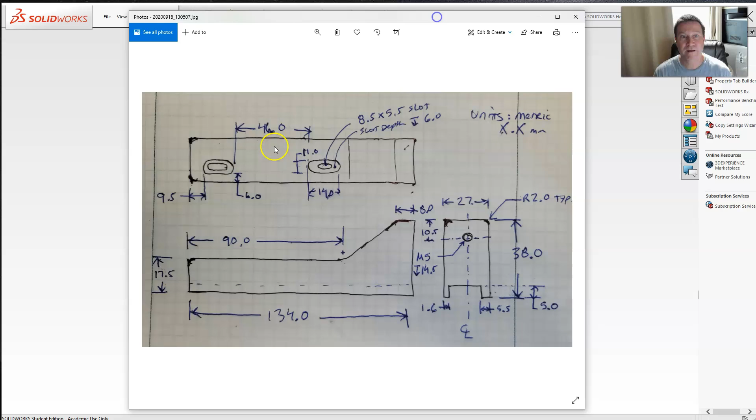So this is what we're going to try to construct here in SolidWorks. Let's start a new part. Say okay. A little slow today.

All right, let's do our first sketch. I'm going to construct it. Always look at a plan of attack here. My plan is I'm going to draw basically this view. I'm not going to put any of the fillets in yet.

Because I do have lower, upper, this dimension, I can just connect two lines, extrude the depth, which is the 27, and then cut out this feature, drill the hole, rotate the top, get our two slots in, and then we're pretty much done.

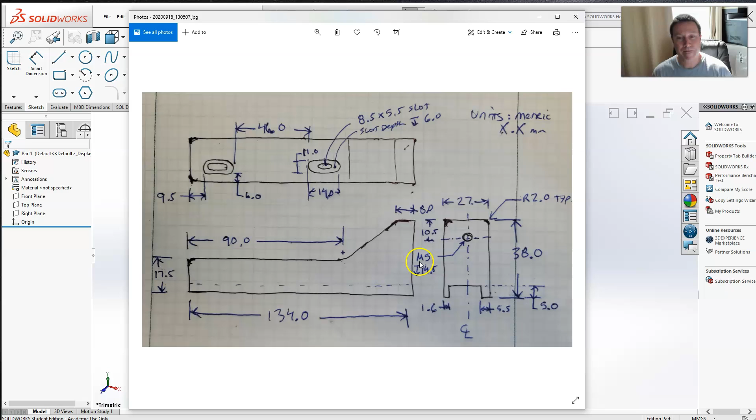So let's start on the front. Make a sketch on the front plane. I'm going to create the bottom left corner as the origin.

Well, I'm looking down here. I'm already in my units as millimeters because I've always kept that as my default. So first thing you want to do is always check your units.

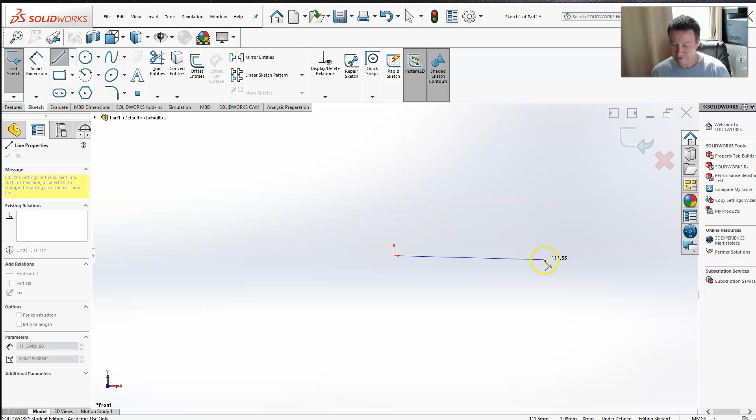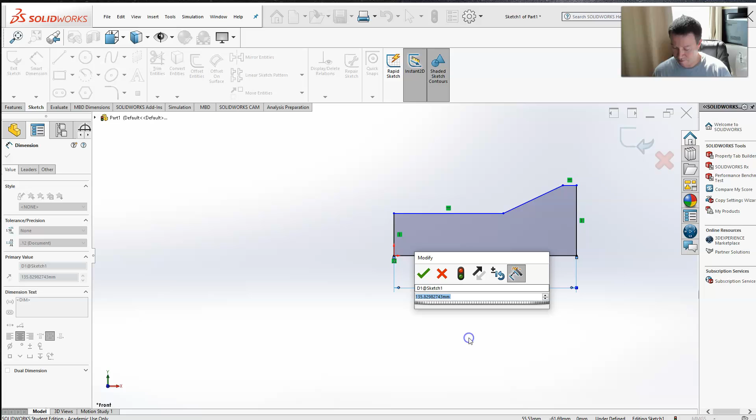Get close. Now let's just dimension it out. We know where our dimension is, so we took from the bottom, 134. We know the height in the back, 17.5.

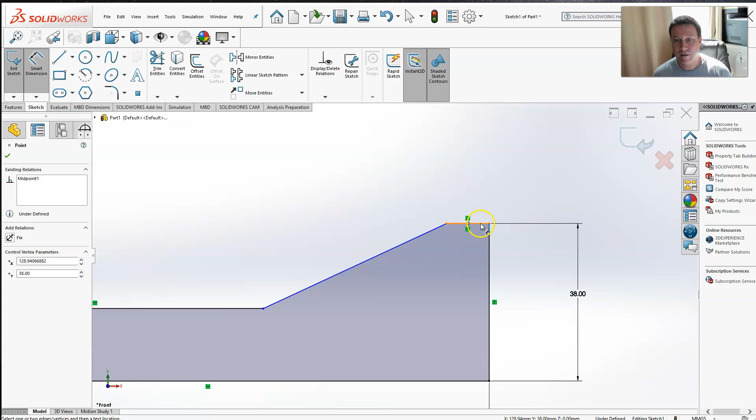And this little itty bitty piece right here, let's zoom in. Why don't you work? There we go, 8. And this component right here, 90.

I can see we're fully constrained. Everything's black.

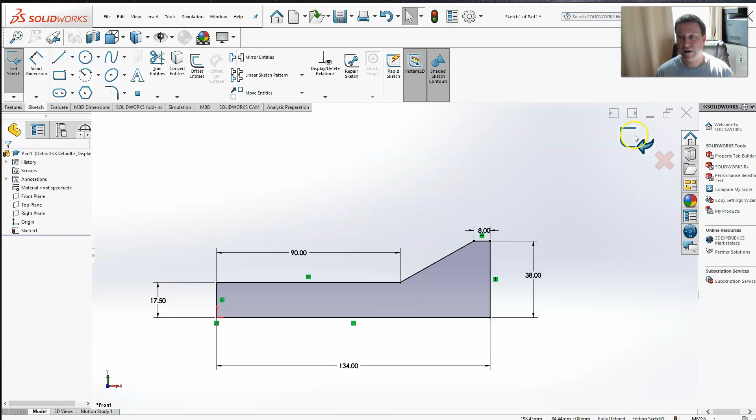Let's go to our features, extrude. You can extrude either direction, doesn't matter. But our width, we measured 27.

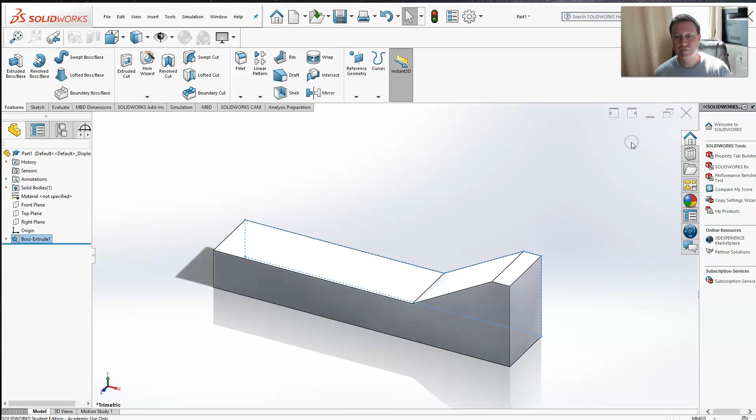Well, got the basic features here. I'm going to work now. Let's rotate. I'm going to do that slot in the bottom and the hole in the front.

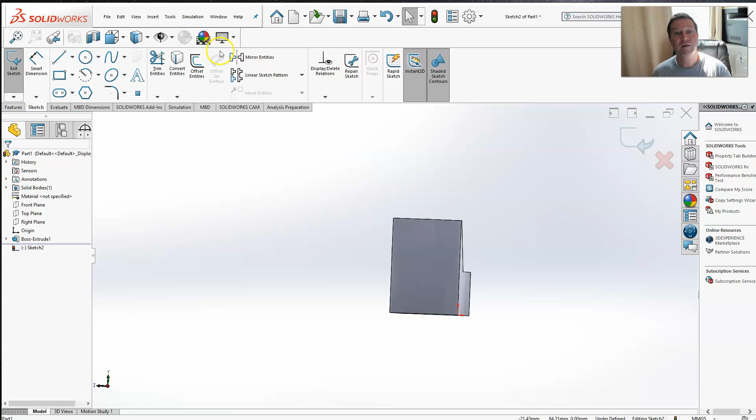So go back to sketch. Select this. And let's rotate straight on.

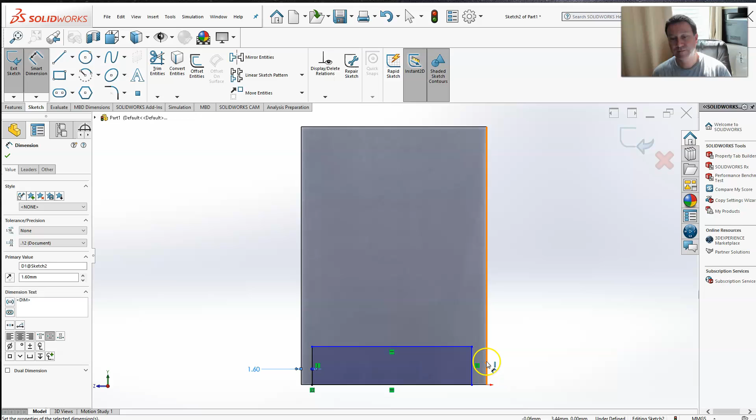And technically, what I'm going to do, I'm just going to do a rectangle since we're going to cut through it. And I'll dimension the rectangle since I'm looking straight on. This will be the left side, the skinny side, which I measured 1.6. The other side, we measured 5.5.

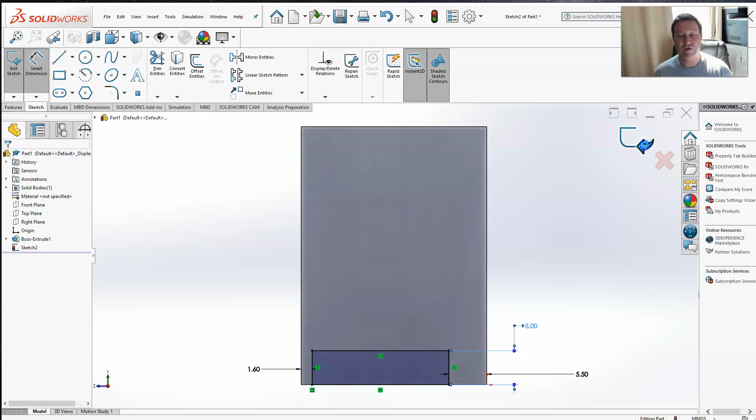And the actual depth was 5. Now I'm just going to do this slot feature first before I do the actual hole.

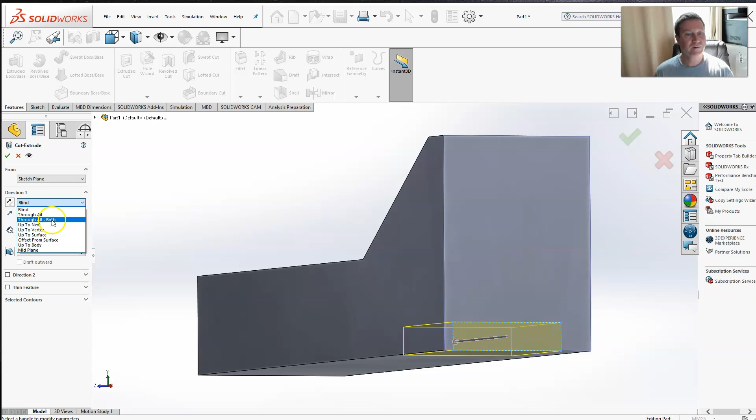Now, oops, I don't want to do extrude boss. I want to do extrude cut. And technically I'm going to go all the way through, so let's go just through all. There we go, through all.

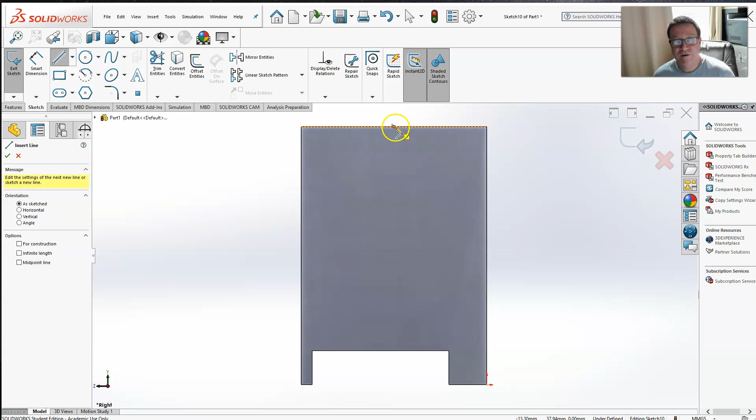Now I'm going to do a sketch for the actual threaded hole. Let me just pick the sketch from this one. I'm going to do it in 2 steps. One, since we measured and we knew it was right down the center, I'm just going to do a construction line.

I like doing construction lines. Constrain to the center of the top, and I'm going to make it 10.5, which is where the hole should be.

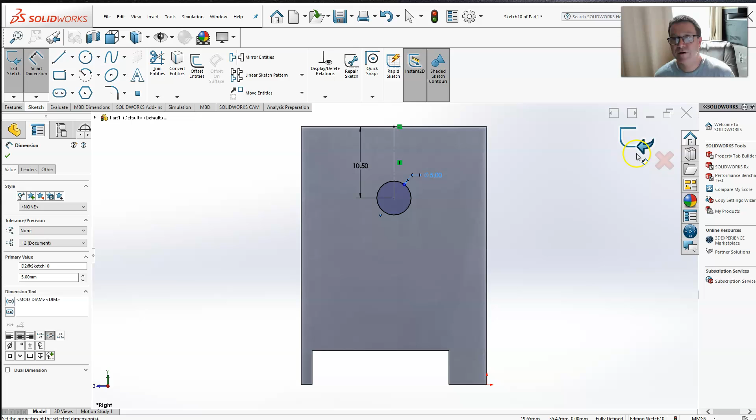Now if I got an M5, it's 5 millimeter diameter. Now I just want to do an extrusion, cut, blind, oops, 14.5. That's why I measured 14.5 down. Perfect.

Now if I want to make it look like a threaded hole, go to the hole wizard. You got threads here.

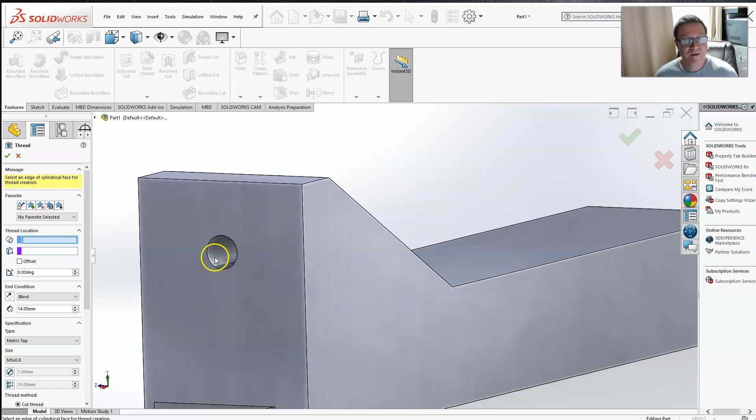Thread location, I'm going to pick the cylindrical hole. Blind, 14 millimeters down, share 14.5, 14.

I actually did some calculations real quick, which I don't have in front of me, but I took that screw I had and screwed it as far as I can into the part. It went 11.1 millimeters down, measured the length of the screw, and then took the difference. I can get 13.8 millimeters into the part. So I'm just going to round it up to 14 for the threads.

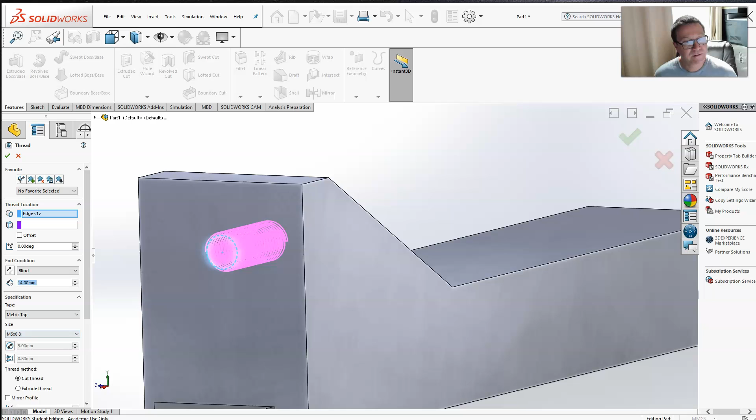Metric tap, M5, cut thread, bingo. Now we have a thread that looks like a thread. Alright, let's take care of our slots now.

Let's put the slots in. Start a new sketch on the top here. There's multiple ways of doing this.

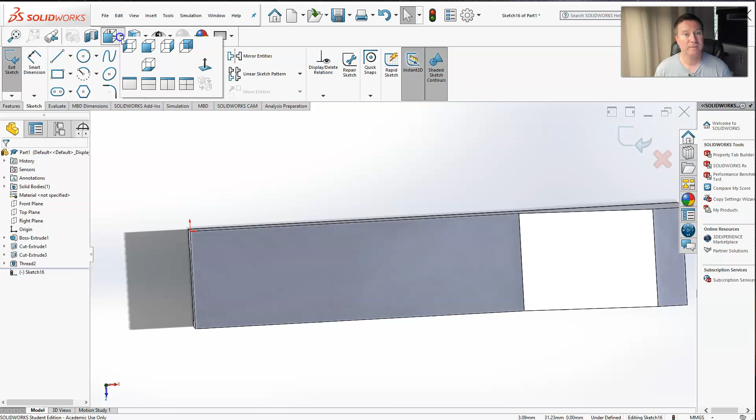Let's use the actual straight slot. There are 2 versions. Take the first version. There are parameters. We know according to our drawing, our sketch, 11 wide, 14 long.

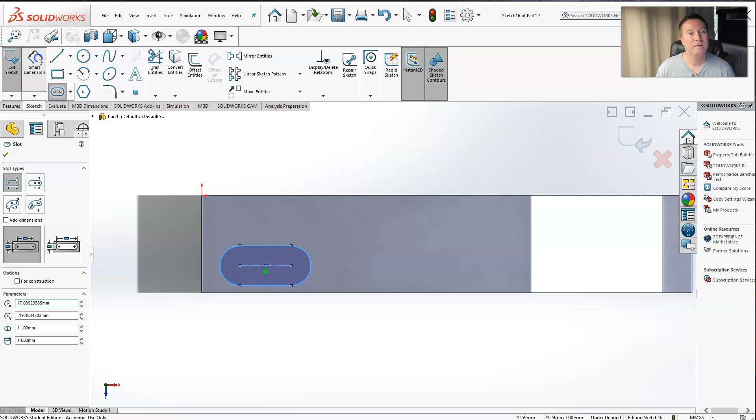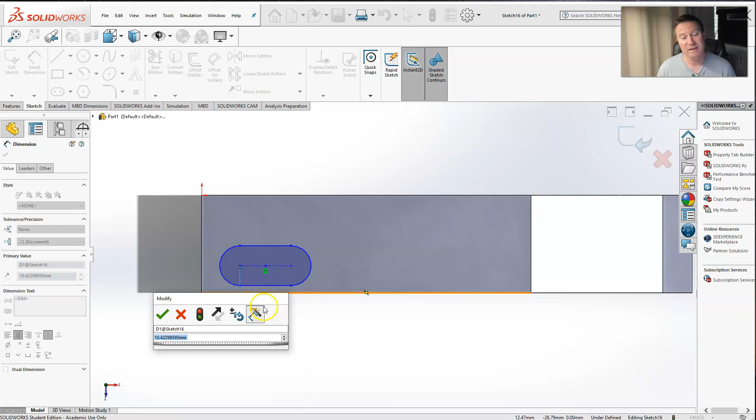Now the tricky part is dimensioning it. Parameters X and Y. It likes to go from the central portion of the arc portion. We measured from the edge though, 9.5. So if our diameter is 11, half of 11 is 5.5, 9.5 plus 5.5 is 15.

Now we had 14 all wide, but that is from the inside to the inside. So we got to take out the 11 circle. So 14 minus 11 should be 3.

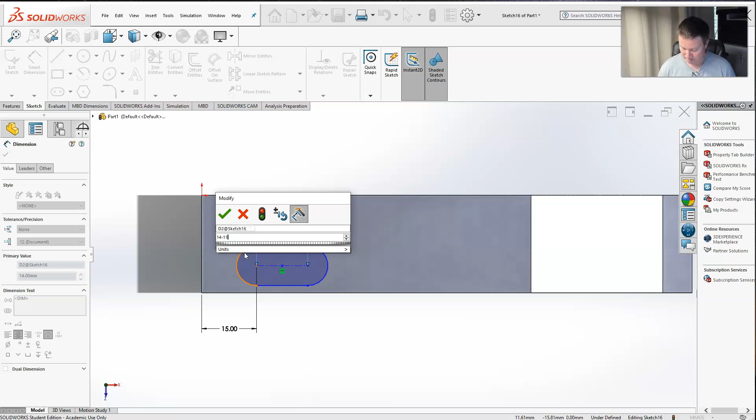There's that slot. But now we got to also dimension it to the edge. We measured from the edge being 6, but now we have to go to the center. So it is half of 11 is 5.5, so 6 plus 5.5 is 11.5.

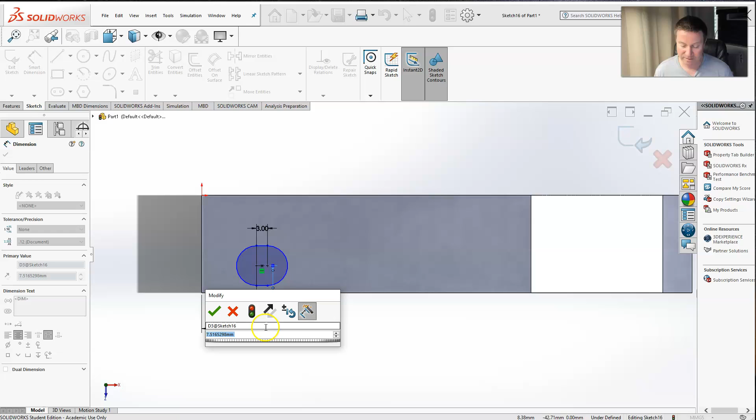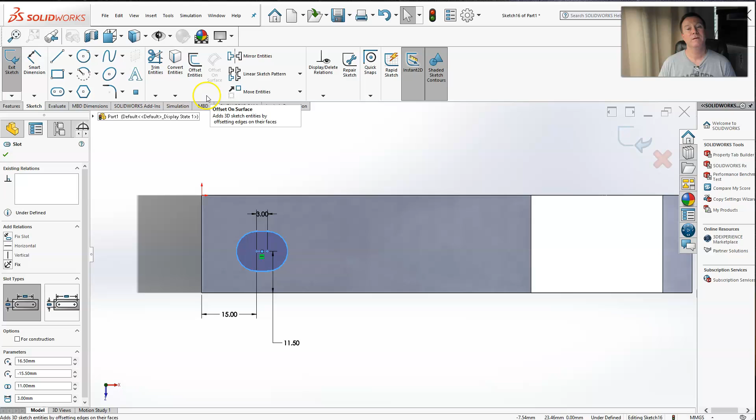Now, let's just make a copy of this. Let's go to, we do a linear pattern, or copy on these. Spot 1 from, let's just pick an arbitrary spot, go over. Let's see if I can dimension this out.

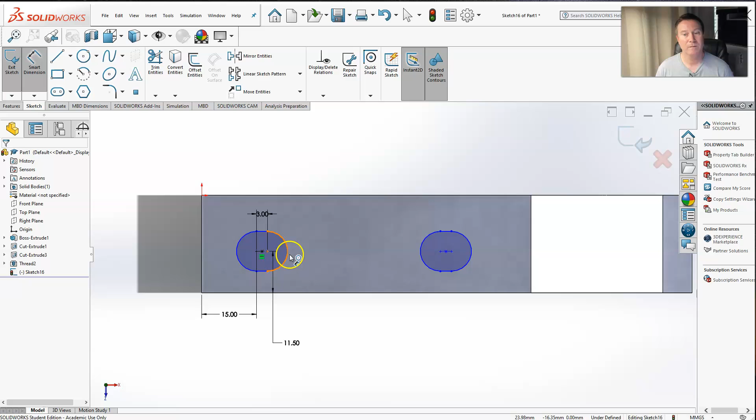Alright, before I dimension that out, let's actually smart dimension it to make it fully closed, fully constrained.

Can I go from the outside to the outside? Nope, it's going to make them go from inside to inside. So we measure from the inside of the one slot to the inside of the other slot. 46. If we're going to go to the center, 46 plus 11.

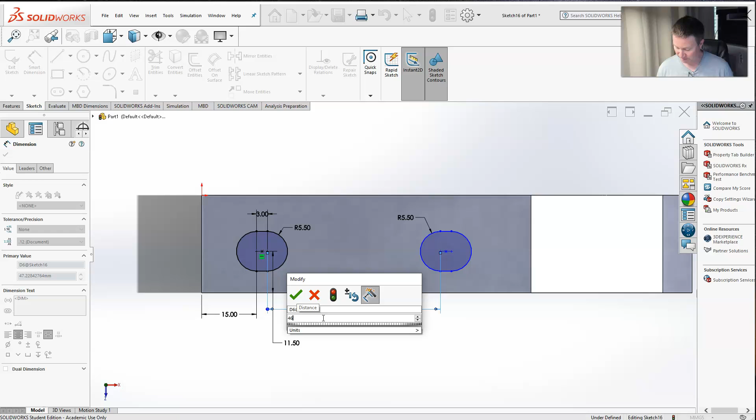So let me just do the math here. 46 plus 11. That puts our two slots where they're supposed to be.

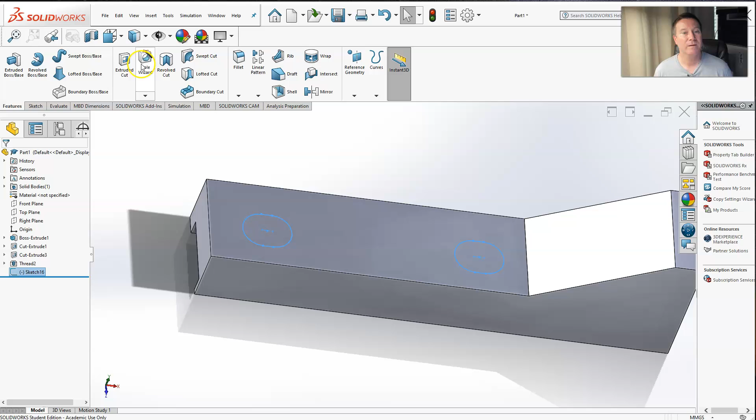Let's cut through now. Go to features. We'll do an extrude cut. I'm going to go down though a depth of 6, which is 6 already. So there is our first slot. Our second slot should be just as easy.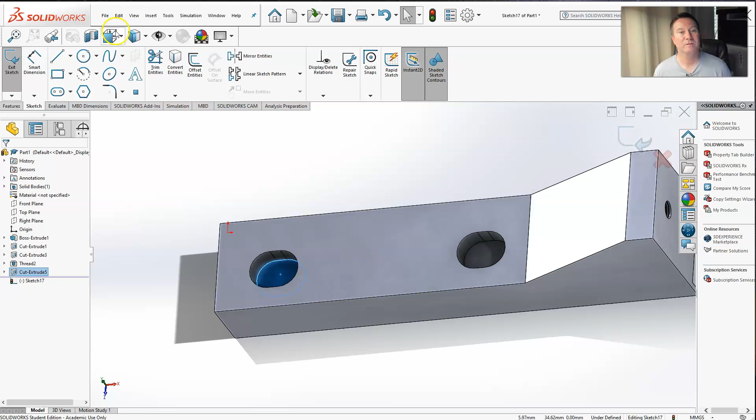With a sketch, sketching actually on that plane. Let me get rid of some of this view here, out the ambient occlusion, all that fancy stuff. So back to my sketch.

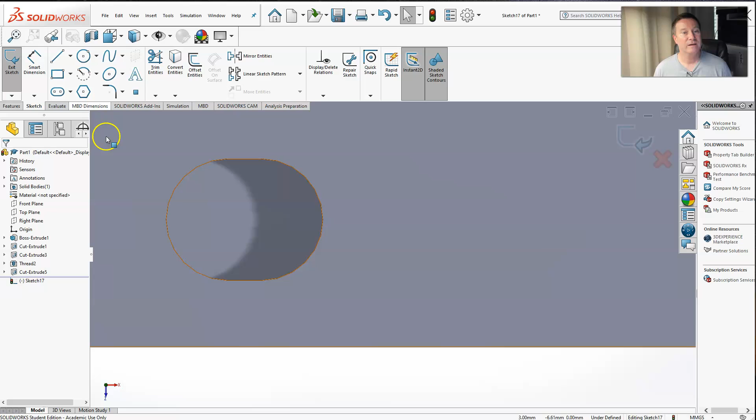Can I do offset entities or convert entity? Offset entities. I want it the other way though. Reverse. And let's see the difference between the inside is 8.5 by 5.5.

The outside is 11 by 14, or I should say 14 by 11. It is exactly, let's see, 8.5, 9.5, 10.5, 12.5, 14.5. So it's 5.5 from the edge. So 5.5, half of 5.5.

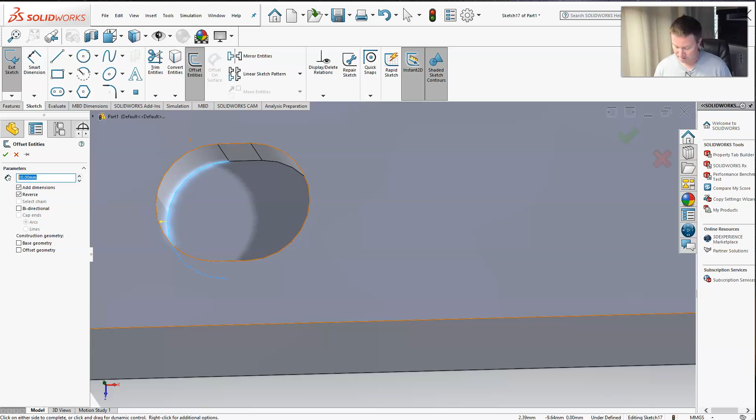Here, let's just do the math. Reverse. 5.5 divided by 2. And let's continue to add in the rest. There's one.

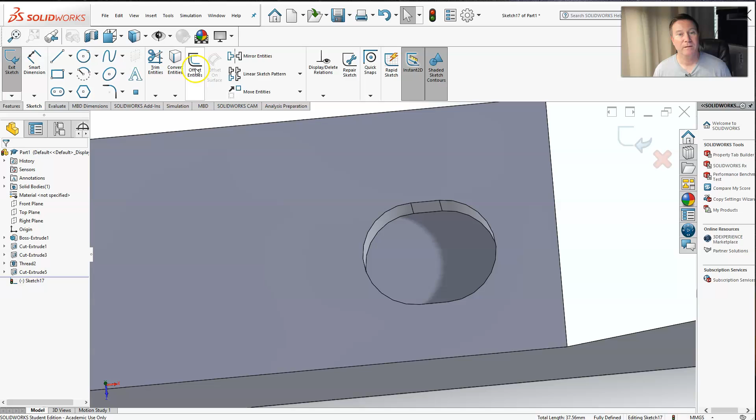And offset entities. Reverse direction. Gotta be careful what you select.

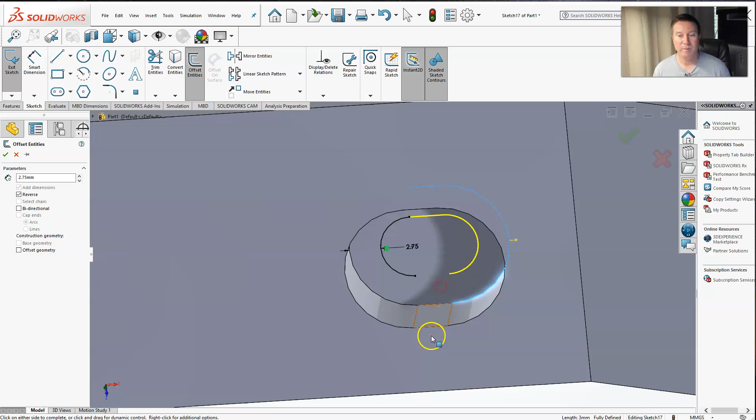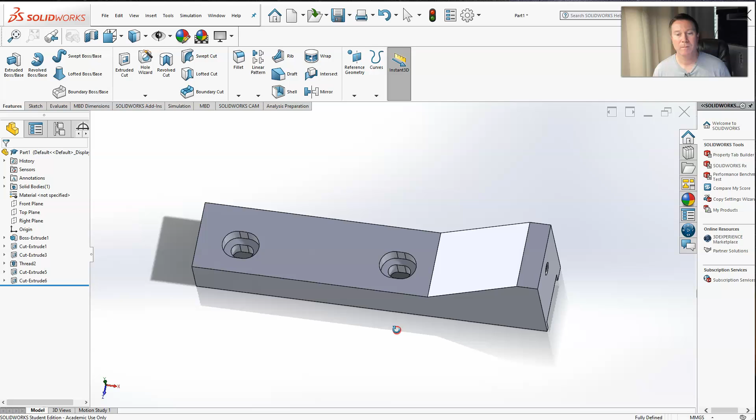Now our last extrusion will be through all. Slots done.

Now the very last thing we have to do is rounding all the edges. You have to remember from our drawing, this is not round here, but the edges are. So along these edges, and basically the entire back, the verticals and the horizontals. So here, vertical, horizontal, along this entire edge up to there, and across here, and then across here.

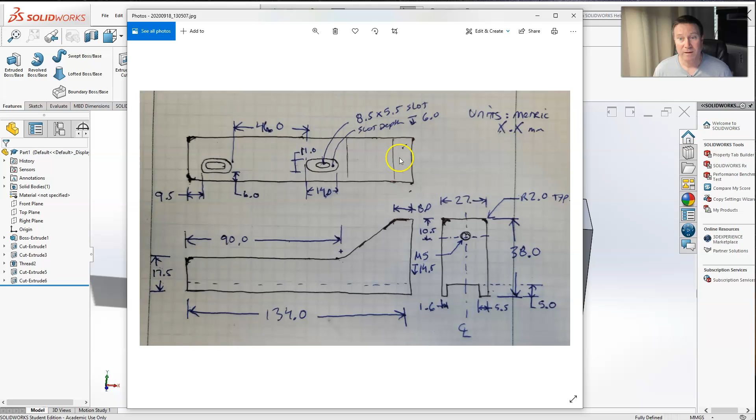And they're all going to be at 2. So fillet it. Select all of our edges. Parameters of 2.

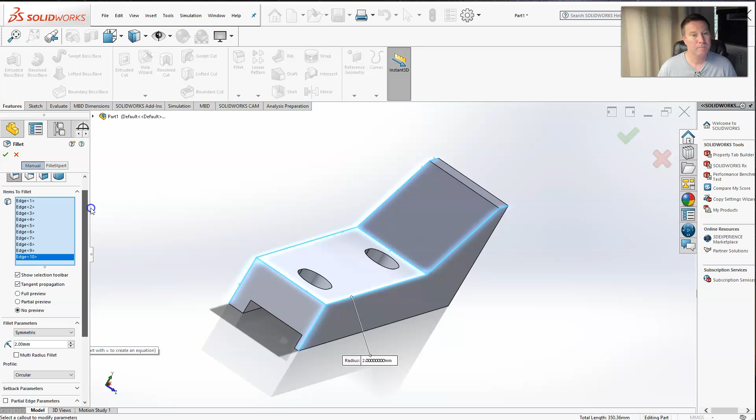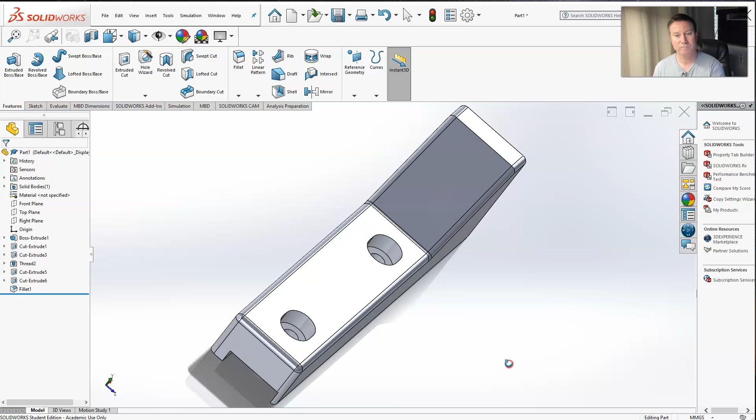Let's analyze our part one more time. Get all the fillets correct. And looks like we have our completed part.